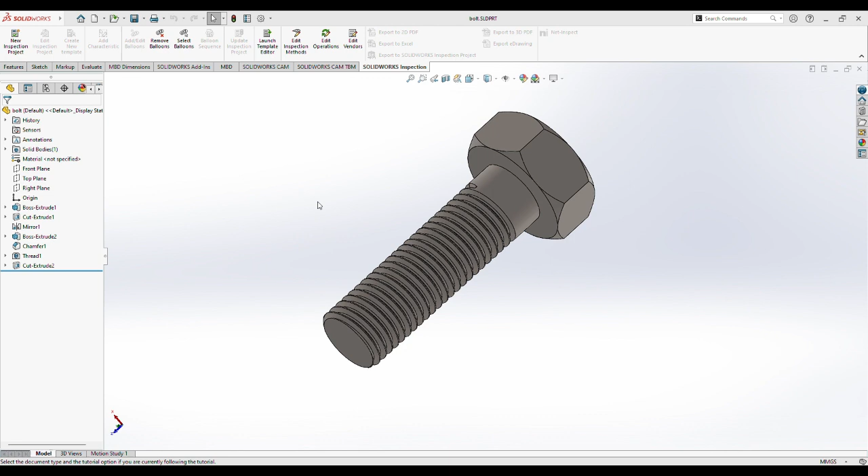Today we will be using SolidWorks. Here we would be creating a bolt and nut with an assembly. First, create a part. Now, upon entering the workspace of SolidWorks, we must first decide which unit of measurement we are using. It can be located at the lower right part of the workspace. We'll be using MMGS, or the millimeter.

Then we would be choosing which plane we would sketch on. Choose front plane. Then sketch. Now we would first create the first part, which is the bolt. Choose polygon. Now from the origin, click, then just drag. Now you have a polygon, then click check. We would be resizing our polygon. Then choose Smart Dimension. We'd like it to be 20 millimeters.

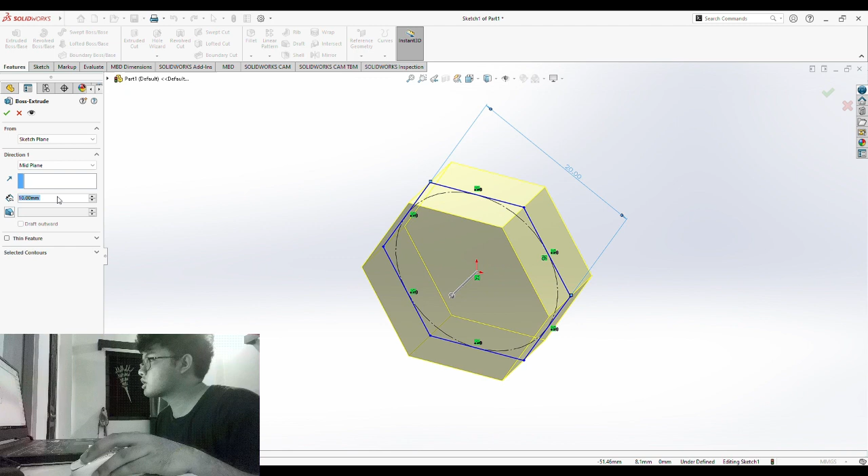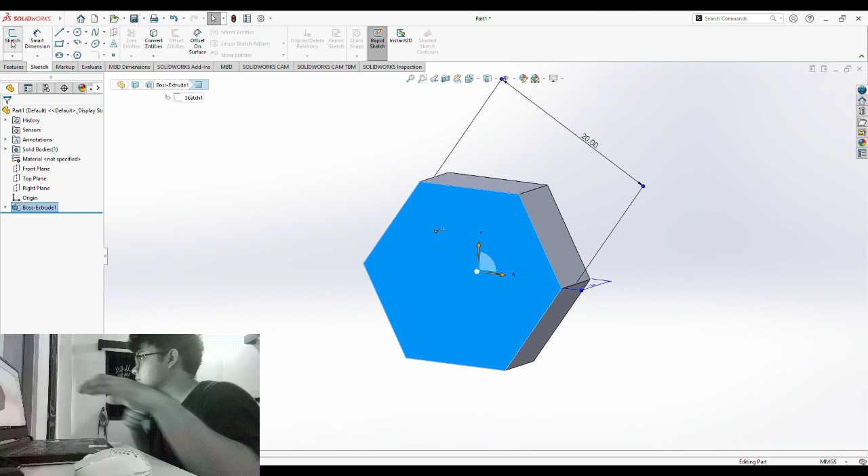Upon resizing, we would be extruding our polygon. Go to Feature, then Extrude. We would be extruding this on its mid plane, so it can extend on both sides. Put in 10 millimeters. Okay. Now we have the top of our bolt. Then click the bottom of the bolt. Then choose Sketch.

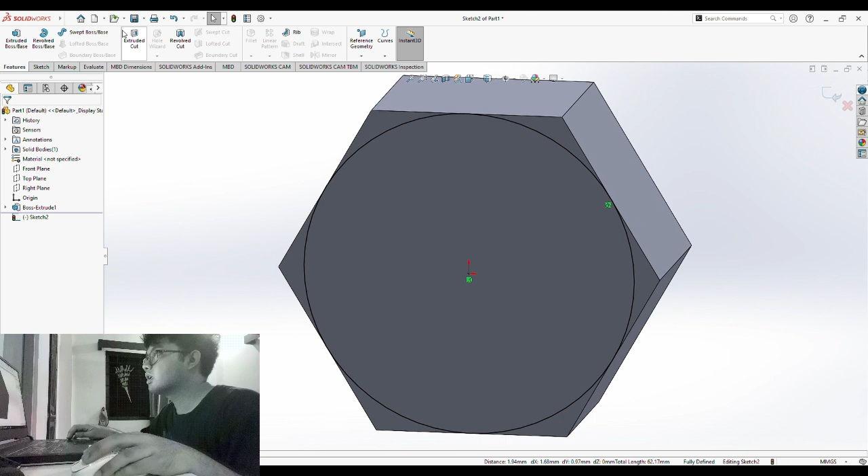Now put in a circle. Then we would be establishing a relationship between the circle and the polygon. Okay. Click the circle. Then press Ctrl and hold. Then click the polygon. Then tangent. Now as you can see, the circle and the polygon are tangent. Then click OK.

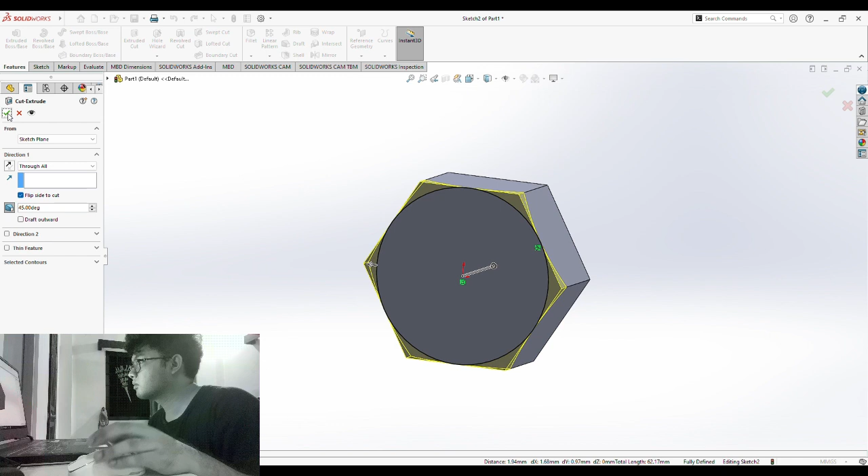Now we would be extrude cutting the circle. Choose Through All. Then flip side to cut. We would be cutting the side. Then put in 45 degrees. Then click OK. Now we can manually do this again on the other side, but instead of going through all the trouble, we'd be using the feature Mirror.

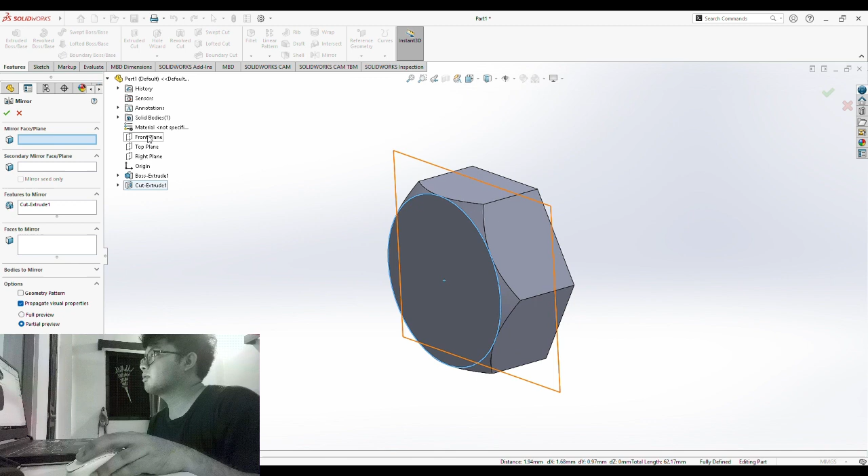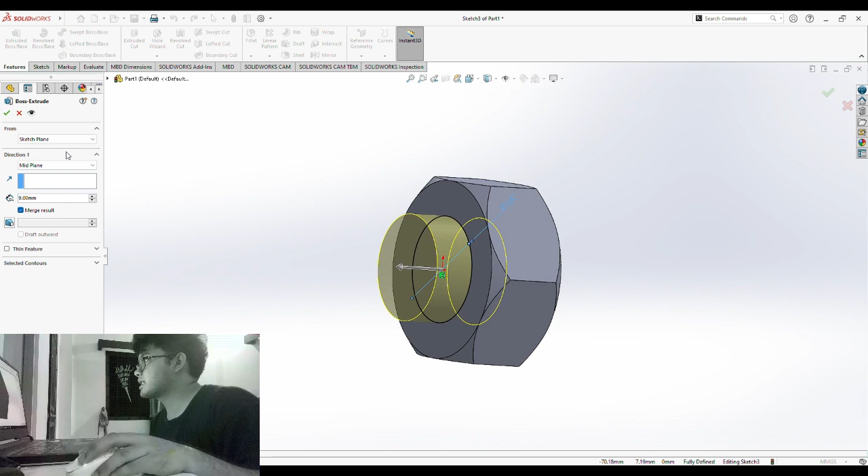Basically, what this is doing is making the other side similar to the front one. Just the mirror face plane, then front plane. Then OK. As you can see, what we've done here is also applied on the other side. After that, click this again, then sketch. Put in another circle in the middle. Then we would also be resizing this into 12 millimeters.

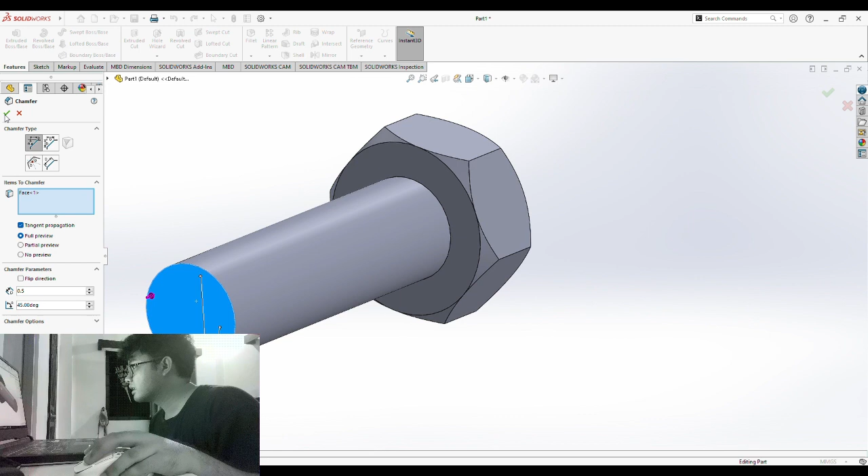We'd also be extruding. Extrude. But unlike before, we would not be using the mid plane, but instead choose blind. Then it must be measured 40 millimeters. Okay. Now we have our bolt. But we're not yet finished. Click the front one. Then click it and then chamfer. Choose angle distance. Put in 0.5 and OK. As you can see, the chamfer has been applied.

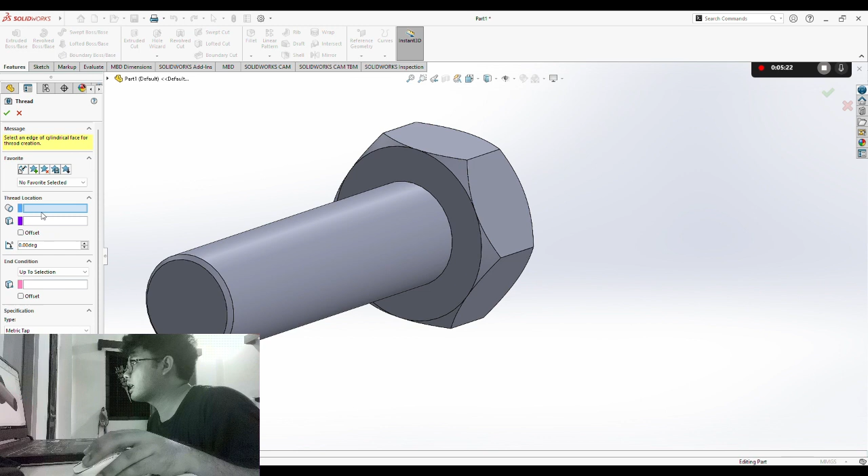After that, we would be putting threads in our screw or bolt. For that, we would be using the feature Hole Wizard. Then, thread. Just click OK. Then for the thread location, just click this. Now we have the thread location. For our end condition, we would be using up to selection. As you can see, the thread has been applied, but we are not yet finished.

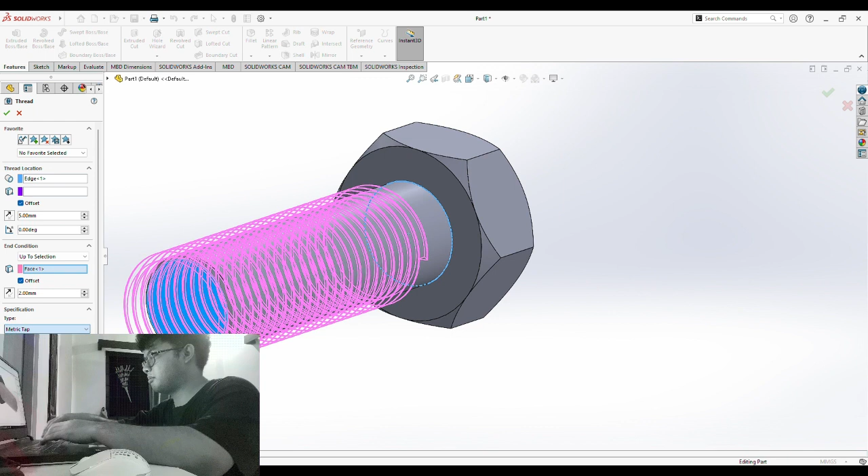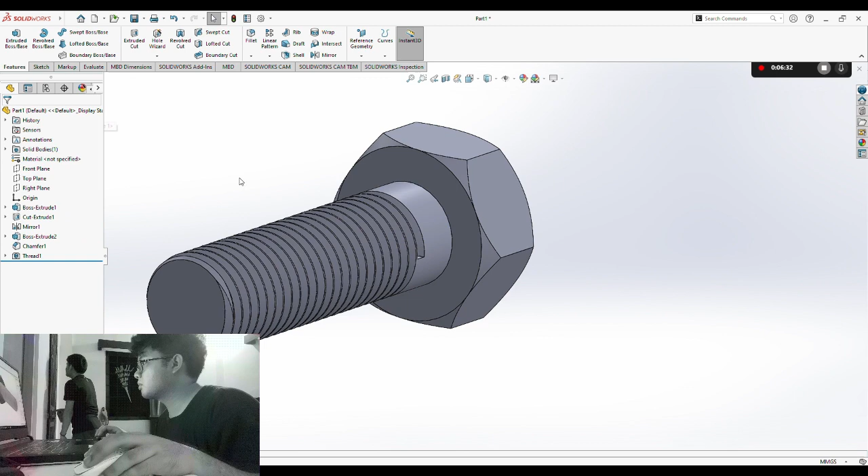We would be offsetting the first thread location. Offset into 5 millimeters. Now for the end condition, offset 2 millimeters. For the specification type, we would be choosing metric tap. Now for the size, we'll be using M12 times 1.5, then cut thread. Upon checking right hand thread, just click the check. As you can see, the thread has been applied.

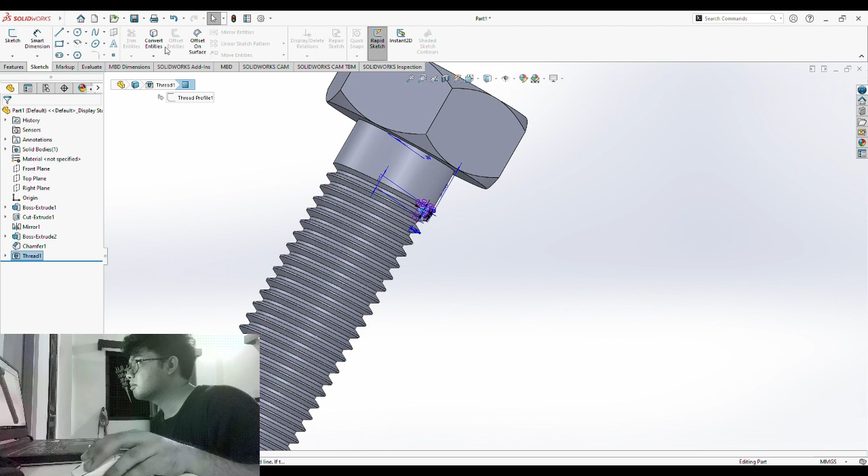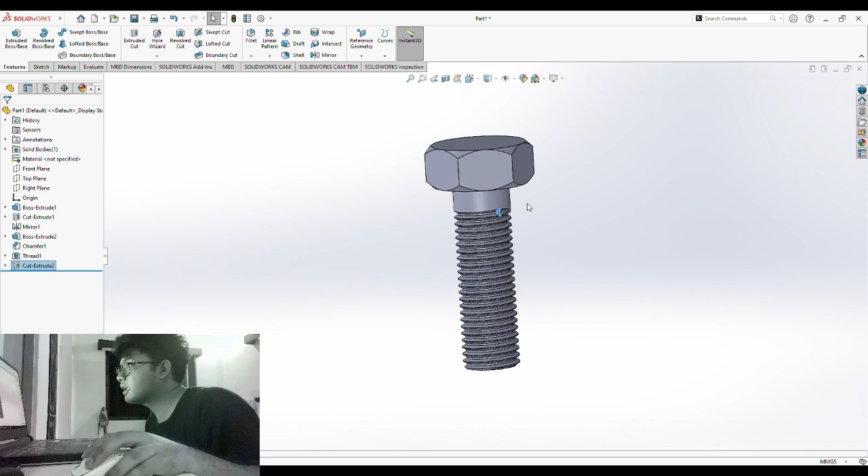Now for the top part, as you can see here, we are not yet finished. Click that little trapezoid. We would be converting this. Then convert entities. Upon converting, we would be extrude cutting. Feature. Click. Convert entities. Feature, extrude cut. Then through all. Upon zooming, you can see the difference that it has made.

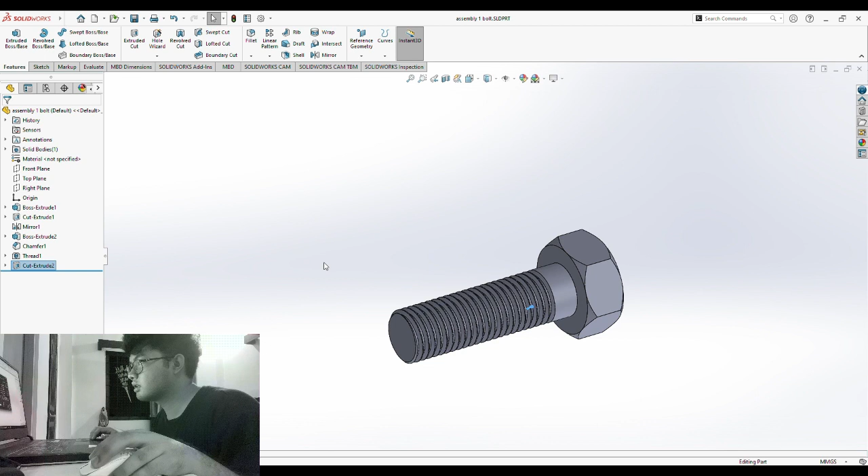Now we have our bolt. And we are done with the first part of our assembly. We would be saving this. Press Ctrl+S, save. As assembly 1 bolt. Then save.

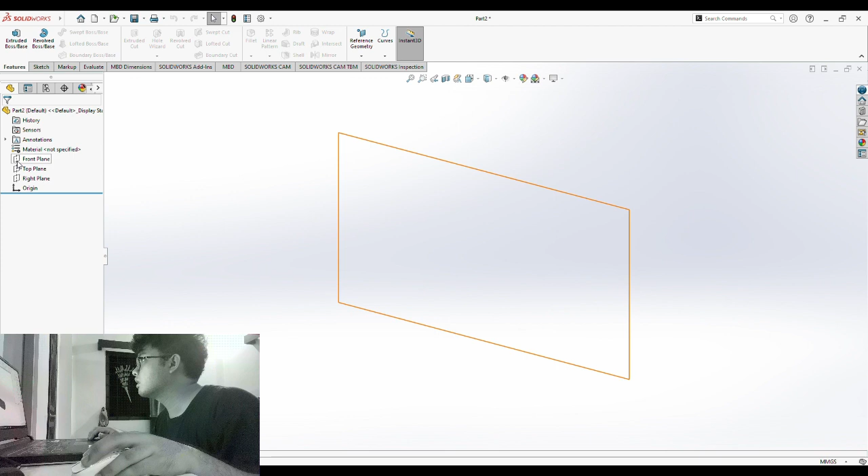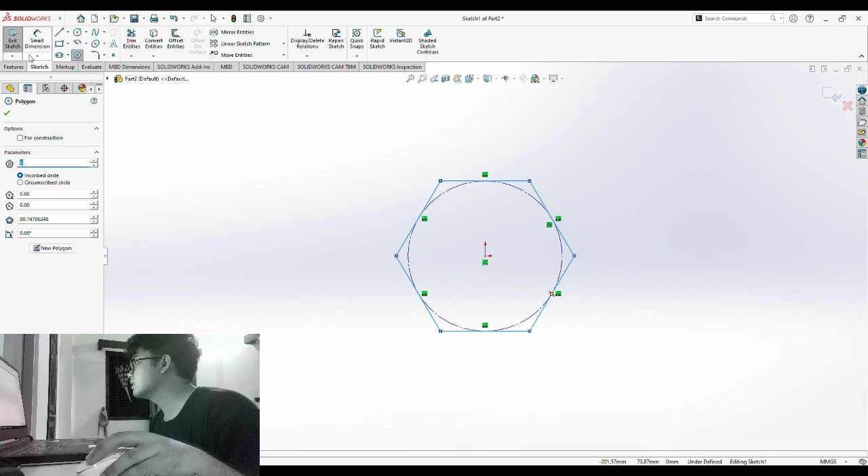Now that we are done with the first part, we'll be creating the nut. Just click File, New, and then another part. Again, check which unit of measurement we are using. Click MMGS. Similar to the first part, we would be sketching on the front plane. Front plane, then sketch. Now we would be creating our nut.

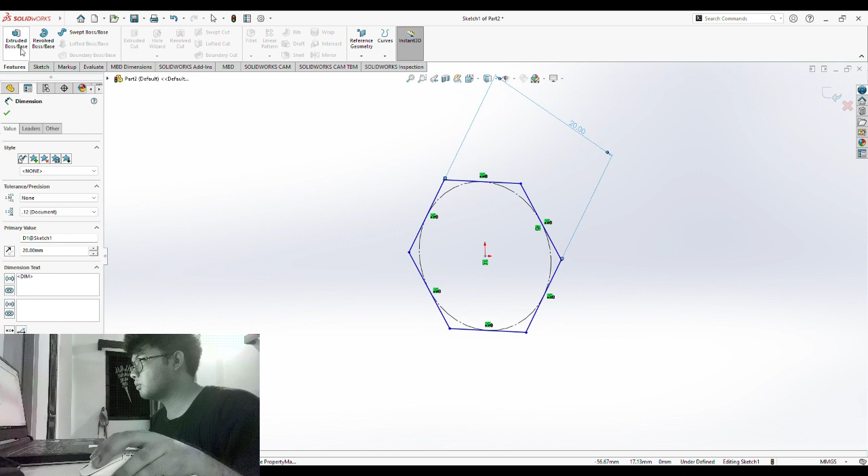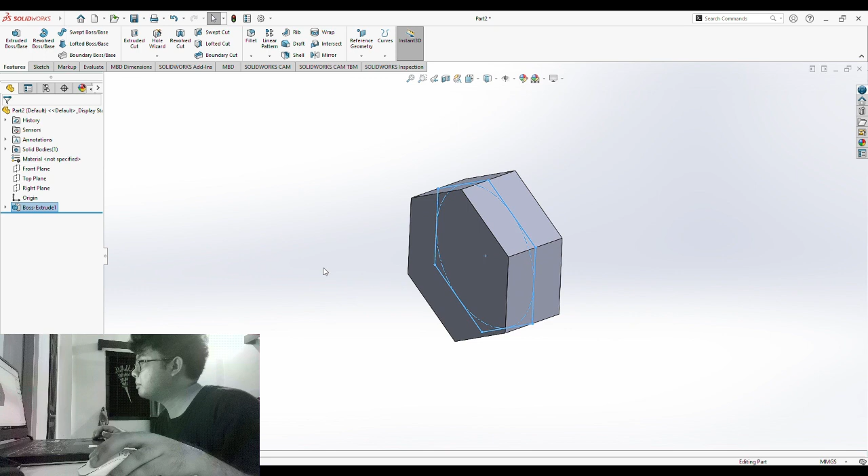From the origin, create another polygon. Polygon. Similar to the first one, we would be resizing this into 20 millimeters. We would also be extruding. Again, mid-plane. 9 millimeters.

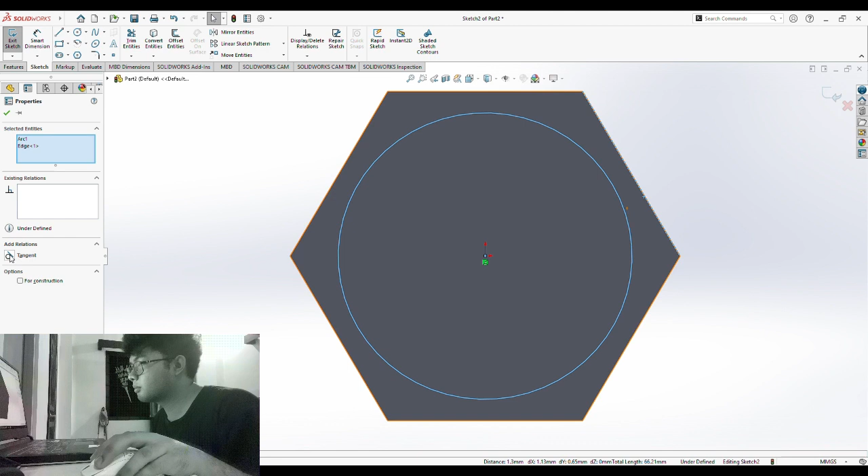Basically, what we are doing here is the same one as the top of the bolt. Pick the front, then sketch. Create a circle from the origin, then just pull. Again, we would be establishing a relationship between the two. Click the circle, hold control, and then click the polygon. Then tangent.

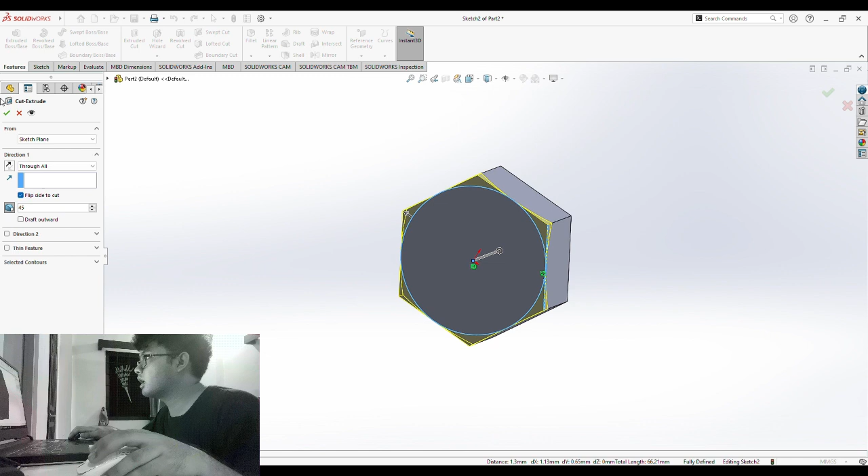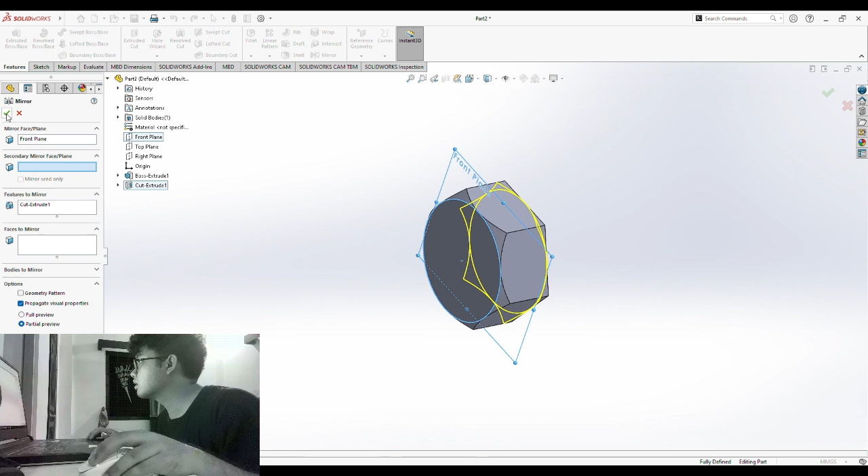Similar with the first one, it would also be extrude cutting. Extrude cut, then through all, flip side to cut, then 45 degrees. Again, we would be applying this also into the other side by using the feature mirror. Then the front plane.

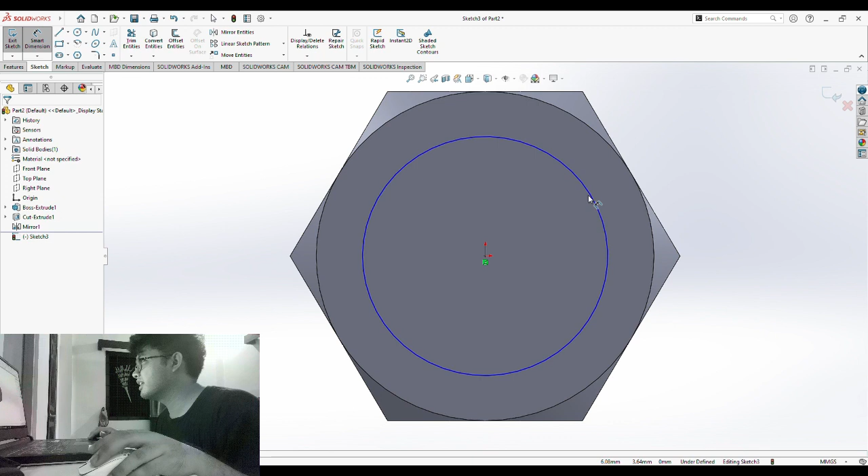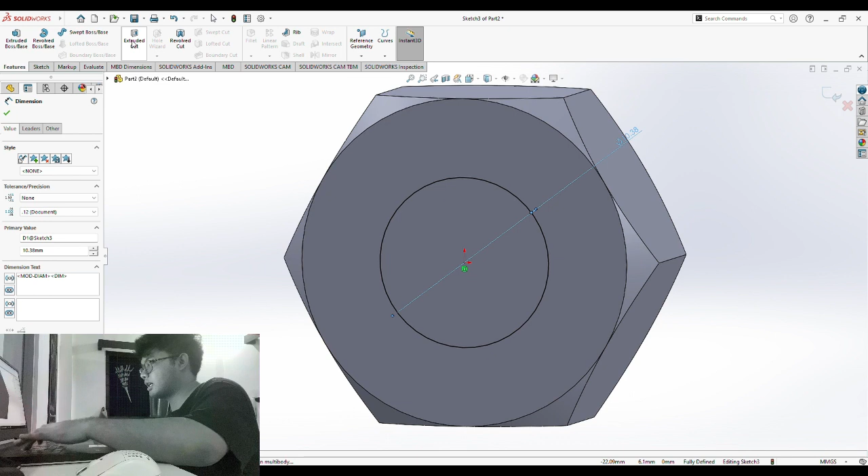Click OK. Now we have our nut, but there's something missing. There's no hole in the middle. Then we'll be creating that hole. Then click the middle part, then sketch. Create a circle in the middle. From the origin, just pull. Smart dimension. This time, it would measure as 10.38.

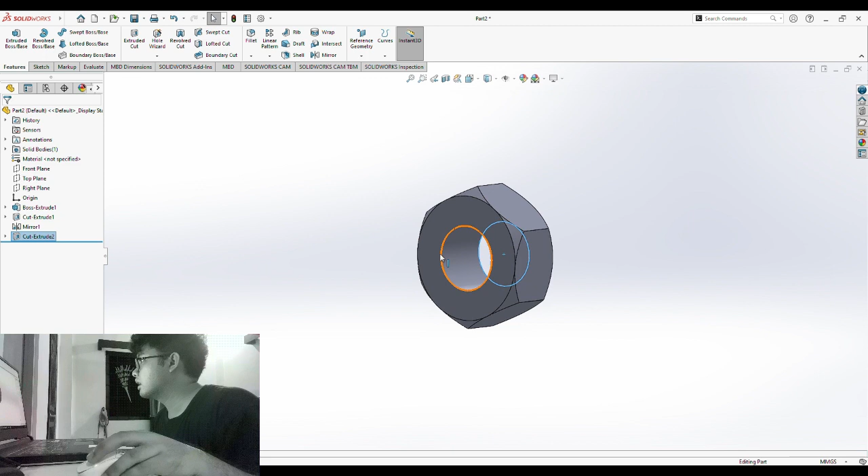For the first one, we extruded this, but this time, we would extrude cut. Choose through all, then OK. So you can see, a hole in our nut has been made, but we're not yet done. We'll be applying the chamfer feature for both of these sides, this and this one.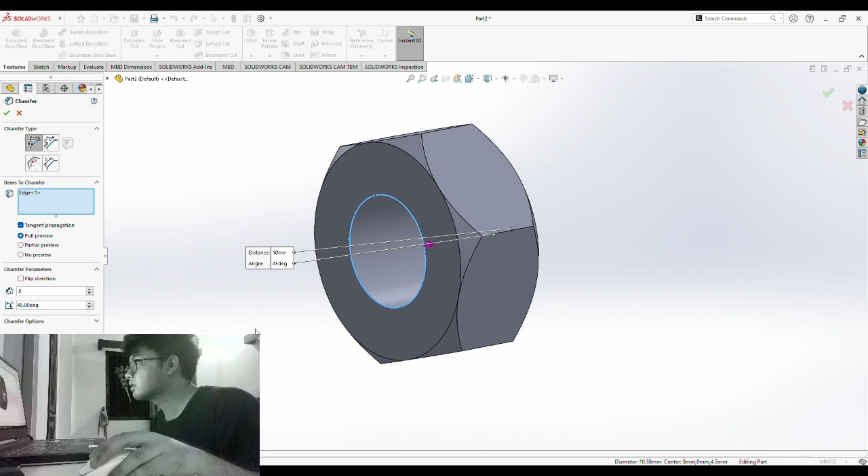Then chamfer. Choose again the angle distance, then put in 0.5 millimeter. Edge 1 and edge 2, for it to be applied on both sides. Then just click the check button and it would be applied. As you can see, it has already been chamfered.

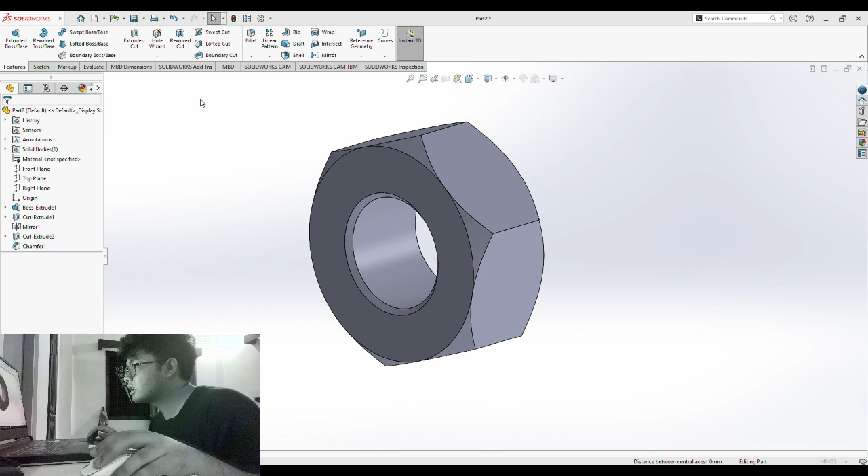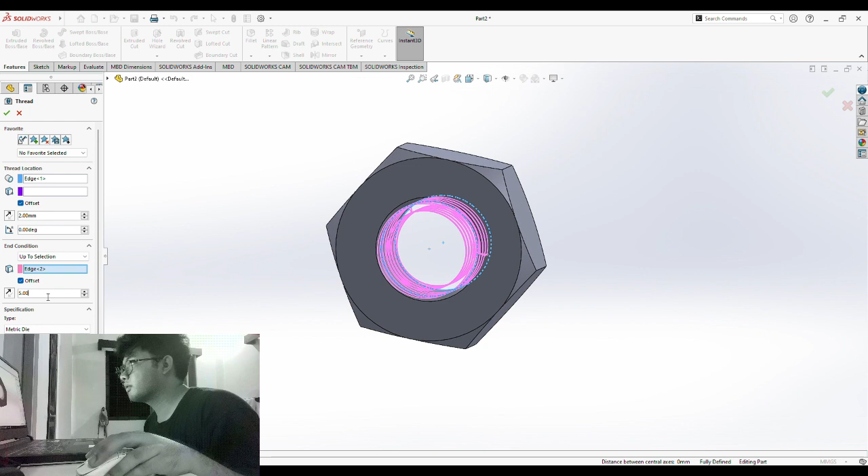Now we would also be adding the thread, but this time inside of the nut. Find the hole wizard, then the feature thread. Okay. For the thread location, for the first one, this, and for the second one, up to selection, this. So you can see the thread has been applied in the middle. Similar with the first one, we would offset 2 millimeters.

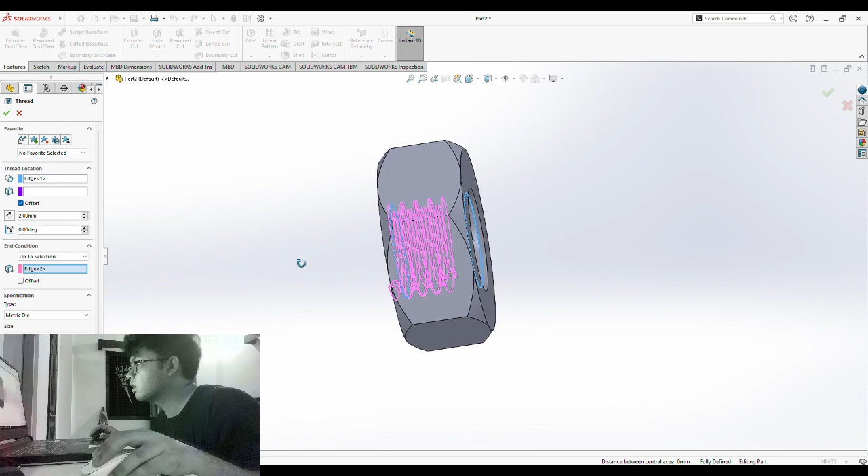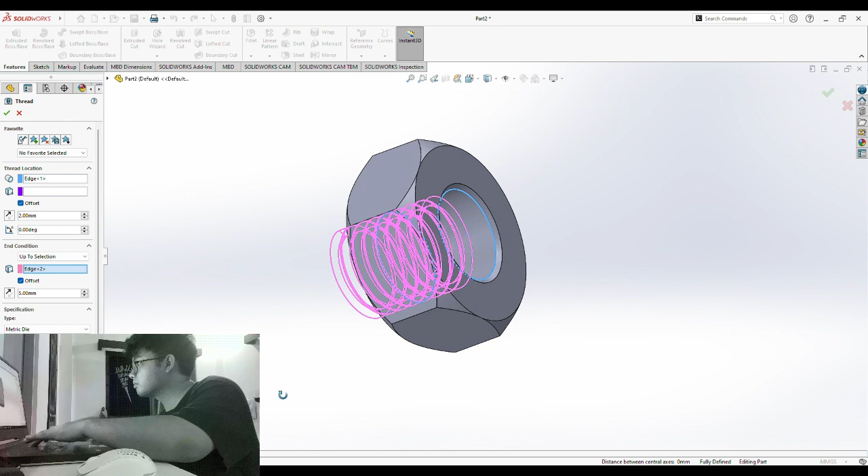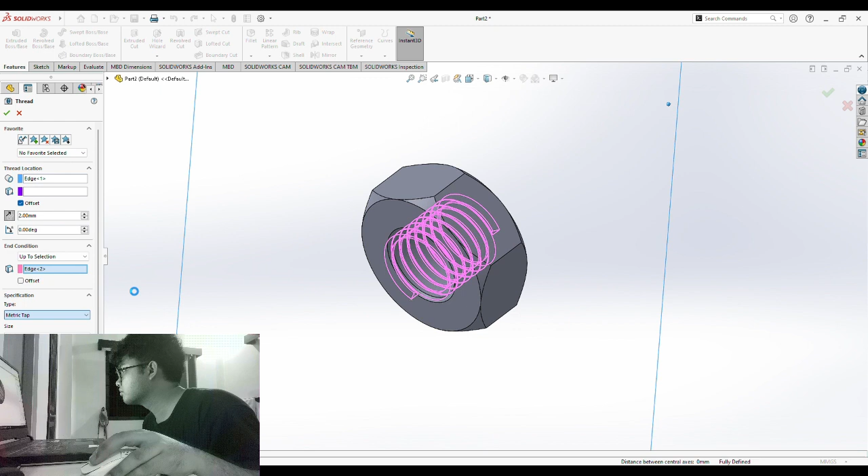For the end condition, 5 millimeters. Or we can just simply brush that off. 0. Or just simply uncheck the offset. Resize this as 5. Oh wait, just 2 millimeters. Here, offset. Here. We'll be reversing. And for the end condition, remove the offset feature.

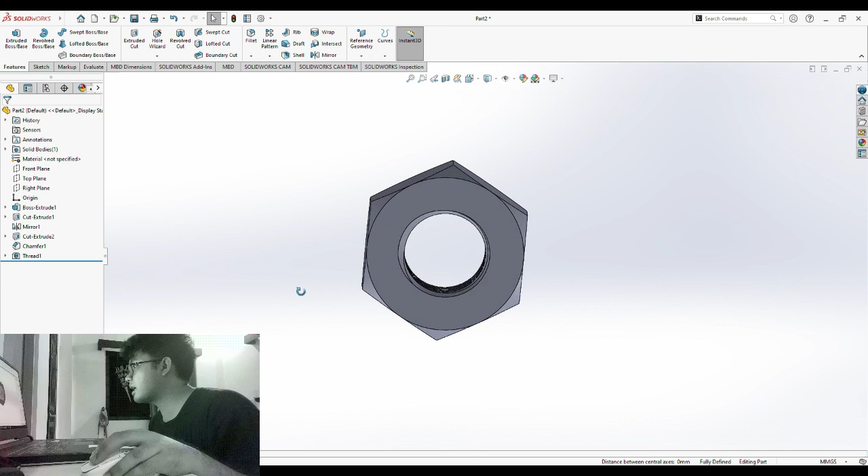This time, in the type of the thread, we would not be using metric die, but instead use metric tap. And similar with the size, M12 times 1.5, cut thread, right hand thread, then click the check. As you can see, the thread within the nut has been made. Now we are done with the second part. We just need to save this. Control S, function save, then put in assembly 2 nut.

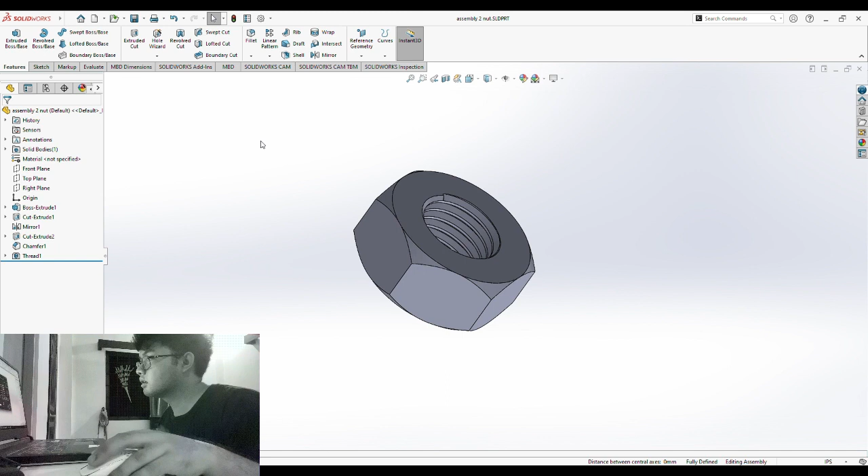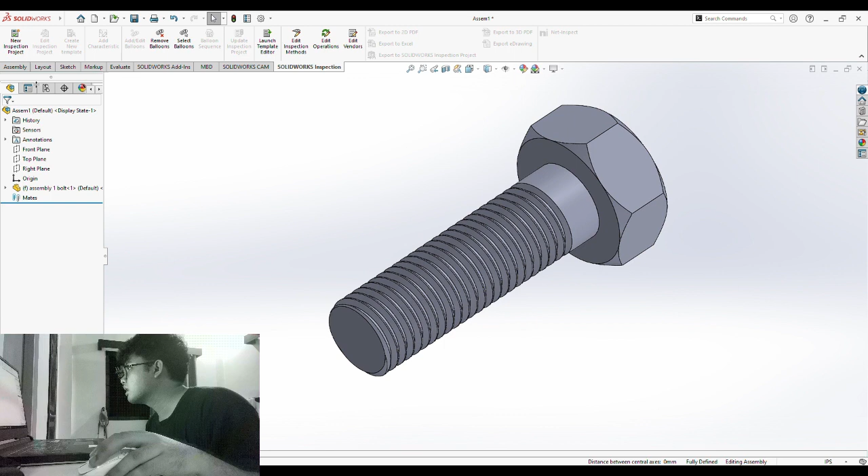Now we are basically done with the two components. Now let's move on to the assembly. New, make assembly from part. As you can see here, what we have done a while ago, the assembly 1 bolt and assembly 2 nut are open. Now choose assembly 1 bolt and just drag. Then you can see our bolt. But we're still missing our nut.

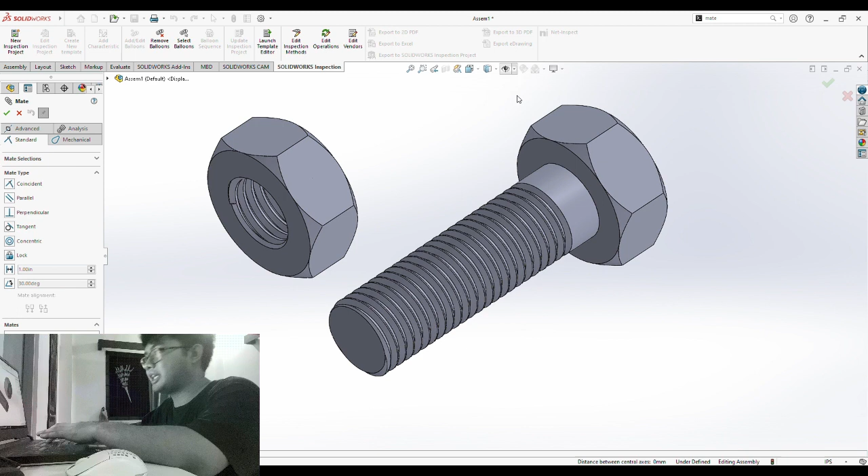In the command, search, insert, then insert components. Choose our assembly 2 nut. And there you go. We have our nut and bolt in our assembly. Now we must establish a relationship between these two. To establish that, in the search bar, put in mate. With this function, we are able to put a relationship between the two.

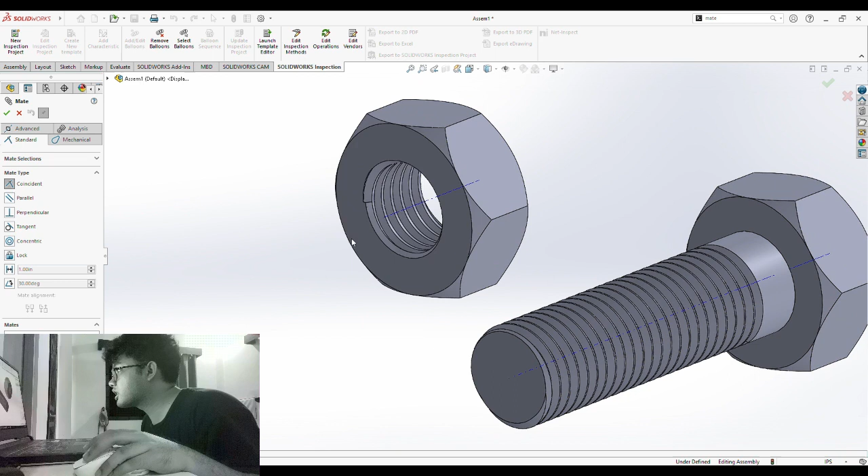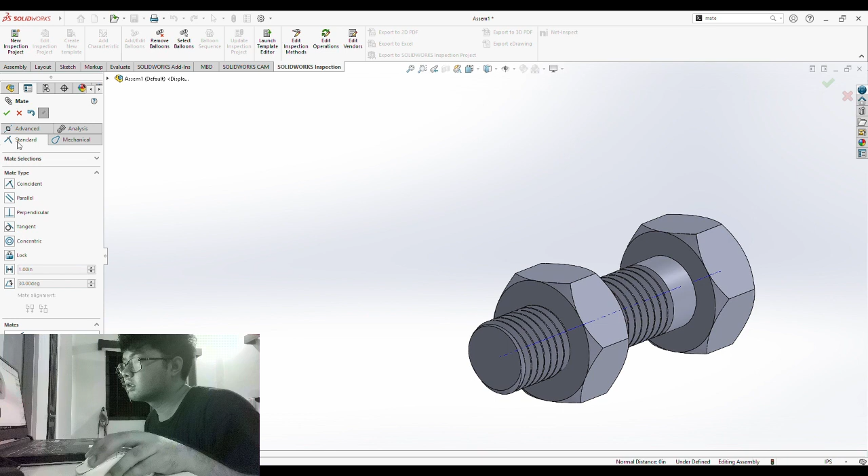For that to be easier, go here in the visibility, then choose view temporary axis. You can see as you zoom in, the temporary axis has been made. Then choose coincident. You can see a relationship between our nut and bolt has been established in a coincident type of mate. Then just click OK.

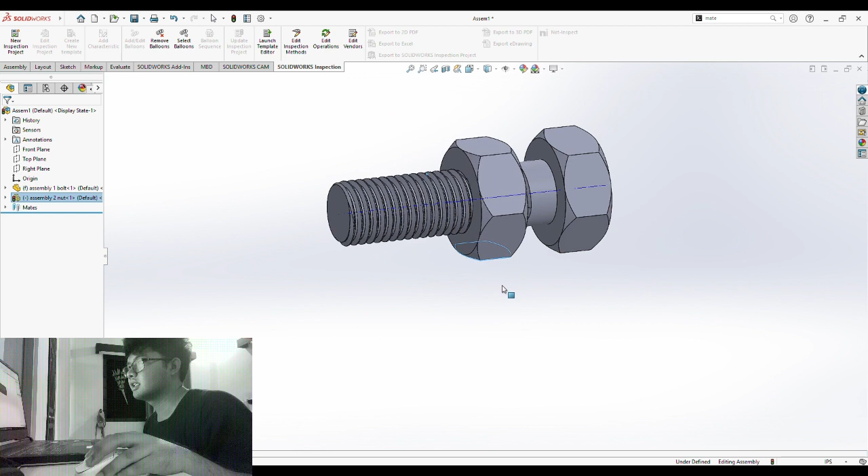As you can see here, you can move this up and down as the relationship between the two has been established. Now with that, the assembly between nut and bolt is finished. And that is how you make a relationship assembly between nut and bolt in SolidWorks.